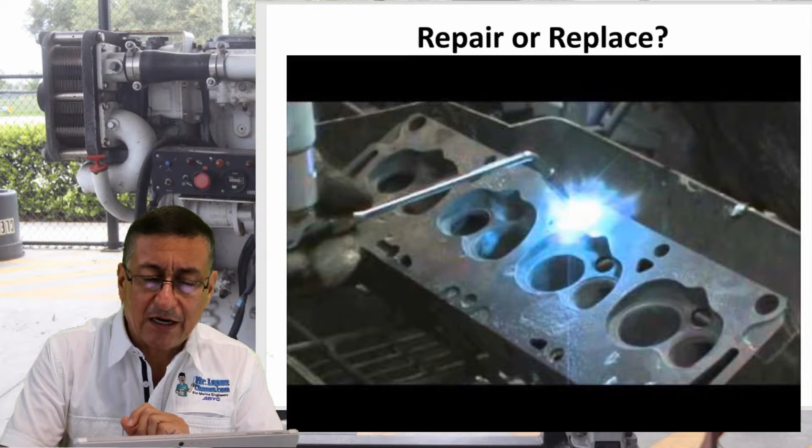Located normally, the typical crack on the head is here, in between both valves. In between the intake and the exhaust valves, the head is cracked over there. This is normally from lack of lubrication and lack of coolant circulating through the head.

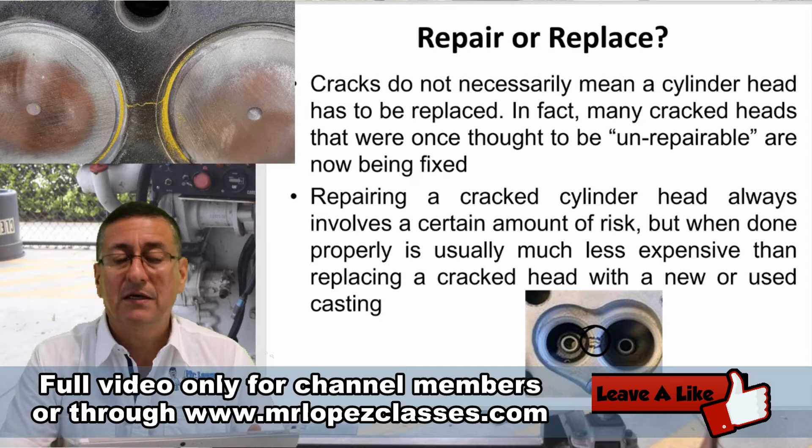The head is too sensitive. It's easy to destroy the head. All right, but I don't recommend repairing the head. What happens when the volume of the combustion chamber is reduced? What happens with the compression ratio? Yes, the compression ratio increases, because right now you have a small pocket in the combustion chamber.

Okay, is it a good idea to increase the compression ratio in your engine? No, it's not a good idea. The engine was calculated, was designed according to those dimensions and those specifications. If you reduce the volume in the combustion chamber, probably you have a little higher temperature in the regular operating temperature of the engine. Right now the temperature is a little higher, and you can introduce additional problems if you

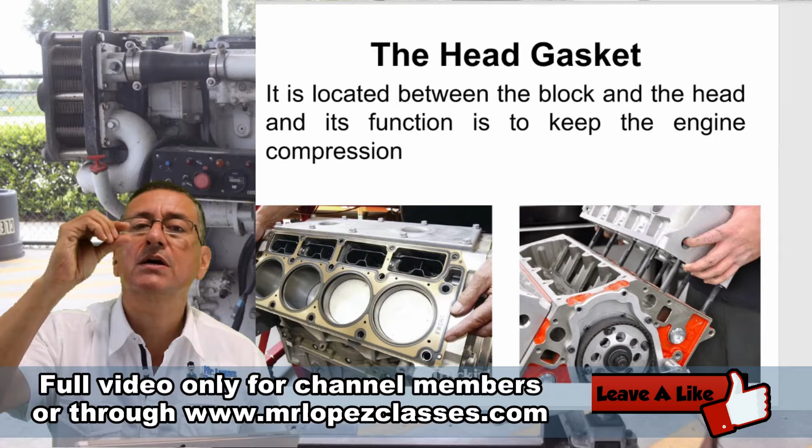increase the compression ratio. For that reason, if you don't have experience with that procedure, the procedure to increase the compression ratio in order to increase the performance, I recommend that if you send the head to the machine shop and they cut it a little, they recommend a new head gasket with a thicker value. Before you install the new head gasket, verify where the holes for coolant are and where the holes

for oil are, and verify that those holes match exactly with the hole on the block and the hole on the head. You need to be 100% sure that the dimensions of the holes on the gasket are exactly the same as the dimensions of the holes on the block and the head. If not, the coolant or the oil will not circulate properly. Be careful with that. This is another important recommendation.

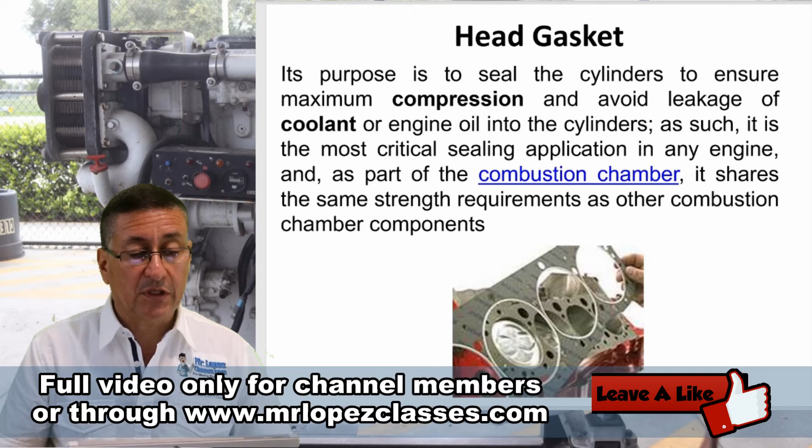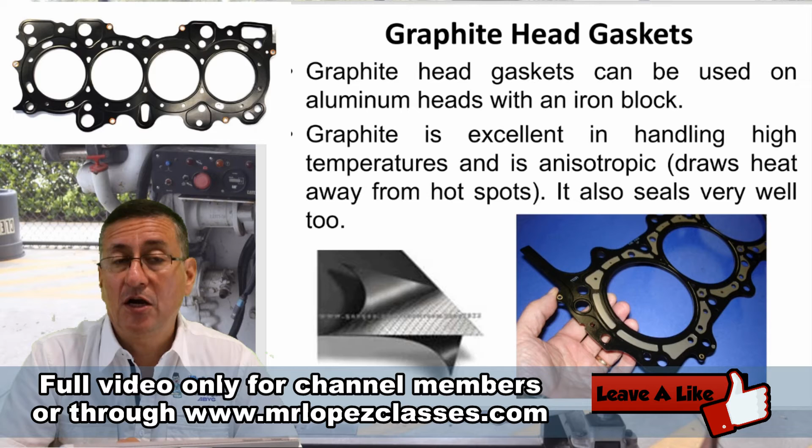There are a couple of manufacturers that have designs of aluminum heads with iron blocks. What do you think about that combination? In my opinion, this is not good, because the thermal expansion of aluminum is twice that of iron. And there is a lot of stress on the head gasket in that area. There is a lot of stress because the aluminum expands twice and the block half.

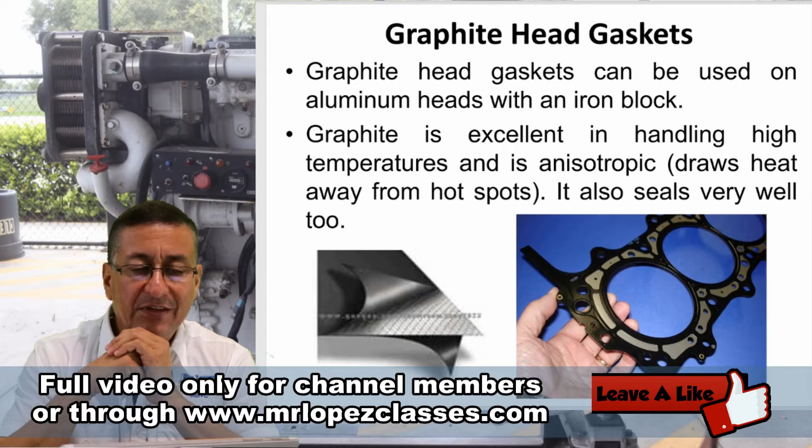And finally the bolts are bent. I don't like that design. The designers that use aluminum heads with iron blocks compensate for that situation with a graphite head gasket.

Now we are going to check the symptoms when the head gasket is damaged, when the head gasket is broken. It's because the coolant passed to the oil, or the oil passed to the coolant. The first consequence, of course, is that on the coolant temperature gauge, the temperature is higher than normal. For that reason, you need to be familiar with the position of the needle in your temperature gauge. You need to be familiar with where the temperature normally is in each engine.

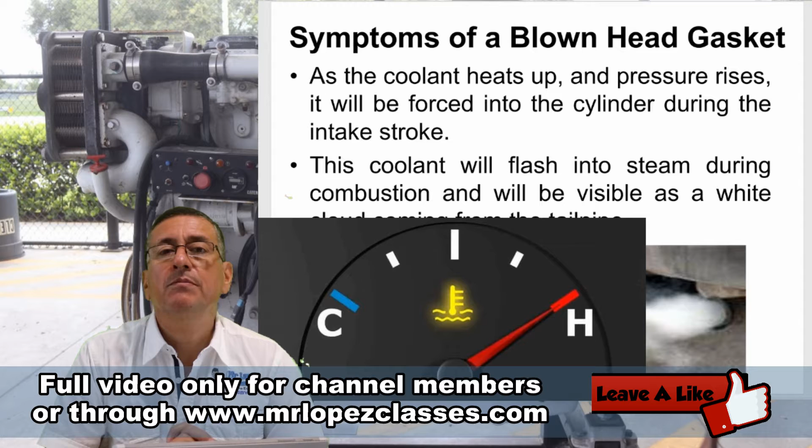And if at one moment the temperature of one of the engines passes the regular position and goes to the red area, you need to stop the engines immediately. You need to stop. No, "I am going to run the engine in idle." No, "I am going to run the engines only 10 more minutes." No. If the needle of the temperature moves up a little, you need to stop immediately and verify different elements that we are going to talk about later.

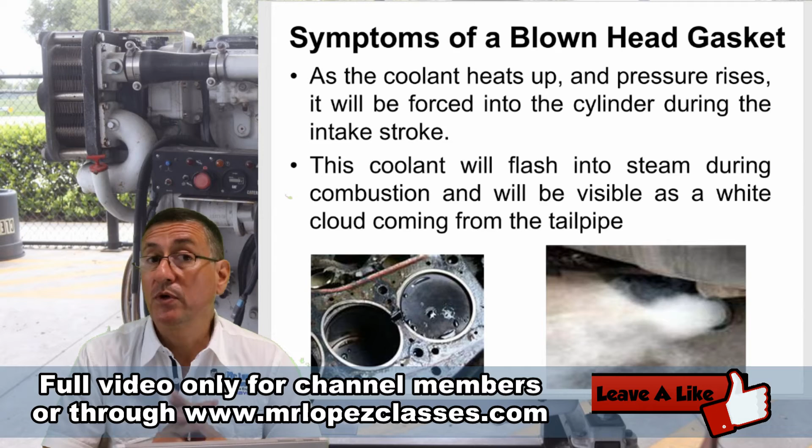Alright, right now you need to verify if you have the appropriate tool to remove the injector, because normally those injectors are completely seized, completely like welded to the head. Removing the injector is not easy. In general, you need to use appropriate tools recommended by the manufacturer to remove the injectors.

Don't try to remove the injectors with a hammer, with vise grips. No, never try to apply the torch. Never try to apply heat on the injector, because you destroy the O-rings. You destroy the internal elements of the injector. You damage the injectors. If you use the torch, you destroy the injectors.

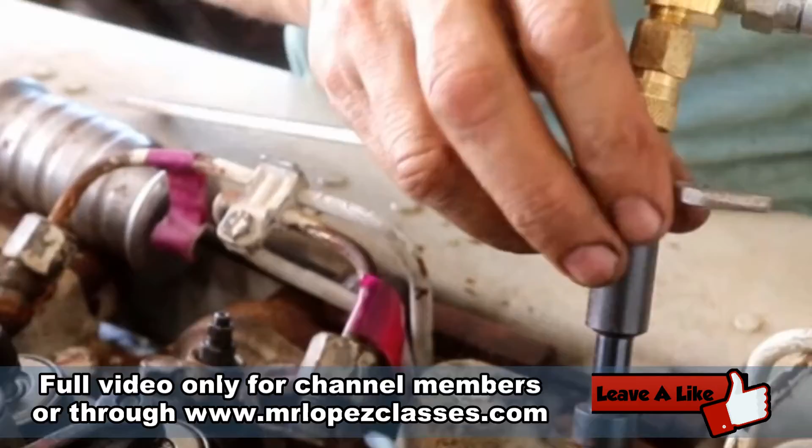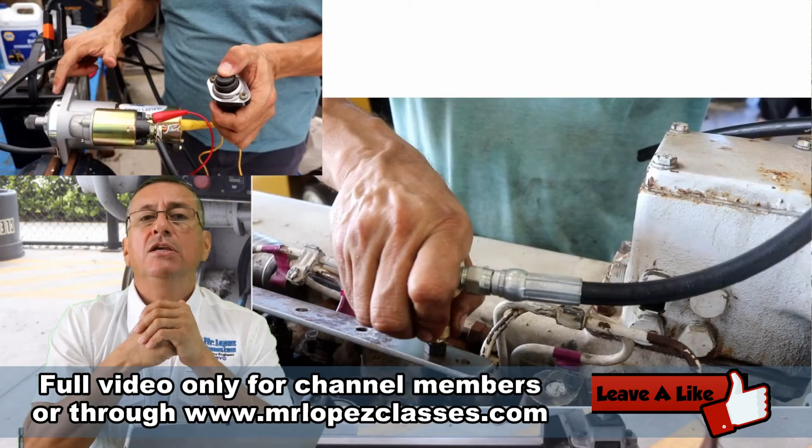All right? When the tool is inserted into the hole where the injector was located before, we are going to fix that tool properly, and now we are going to crank the engine 4 times, 5 times until the pressure reaches the maximum pressure recommended by the manufacturer in the manual. Once again, if you don't have the manual, don't try to do that procedure.

Suppose that, like this, I have one cylinder with low compression. Okay, I am going to remove the compression test element, and we are going to add a little amount of engine oil, motor oil, the same oil that you use regularly in that engine. And we are going to introduce a little, 0.5 ounce of oil. What is the function of the oil? The oil goes onto the head of the piston and seals around between the cylinder and the piston head.

And now we are going to install my compression tester again, crank the engine again, and verify: oh, the compression right now is 650. The compression increased. Alright, where is the problem located in that cylinder? On the piston rings.

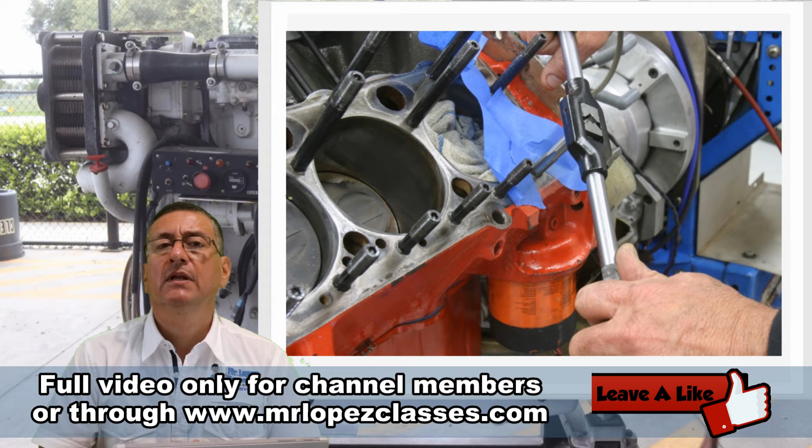If for some reason it's not possible to find the new bolts, the original bolts, for example standard, and you found similar metric bolts, yes, you can replace all of them with metric, but I recommend trying to repair the threads. Try to pass the new tap in order to be 100% sure that the threads are exactly the same as the bolts that you have.

The procedure is simple. I explained the procedure in our introduction class. You need to select the appropriate tap according to the type of threads on the head bolts, and rectify the threads. This is very important. Alright, be careful, check the specifications, check the procedure recommended by the manufacturer in order to apply the appropriate torque.

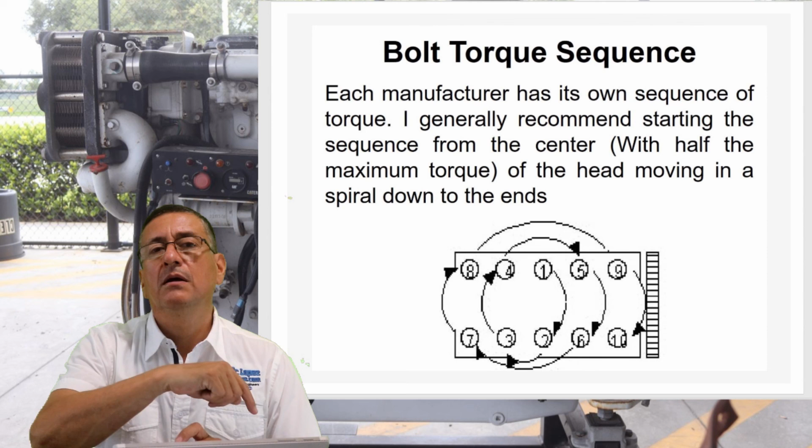Normally, when I don't have the information, if I am working in the middle of the ocean and I only know the maximum torque, I use that spiral recommendation, or zigzag, like other manufacturers recommend. Okay, but the spiral recommendation is good. You start in the middle and you follow the spiral path until you finish on the side of the head.